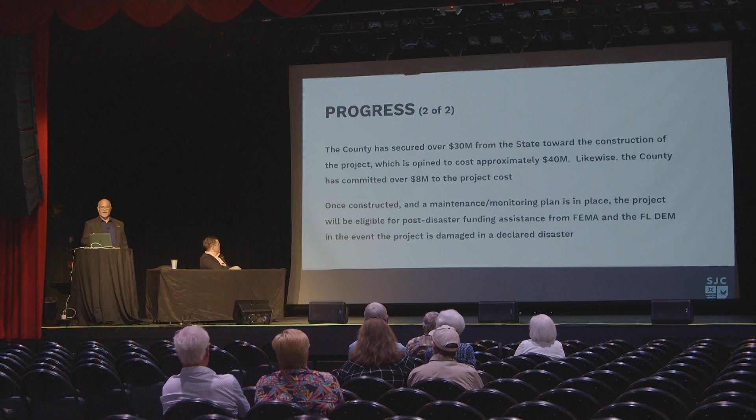So, a little bit about the beach. There are variations in the beach, as we've seen if you've ever ridden down the whole beach. There's a whiter, sandier area towards the north, and a lot of that is sand that drifts down in the prevailing north to south flow from the Army Corps projects in Jacksonville Beach.

And then it transitions into more of the shelly coquina down towards the Guana Beach Park. So that sand coming from the Duval project has really been at least matching most of the erosion that didn't come from storms in that northern 1/3 of the project area, roughly 3 miles there. So we've tried to match this to the actual different areas of the beaches.

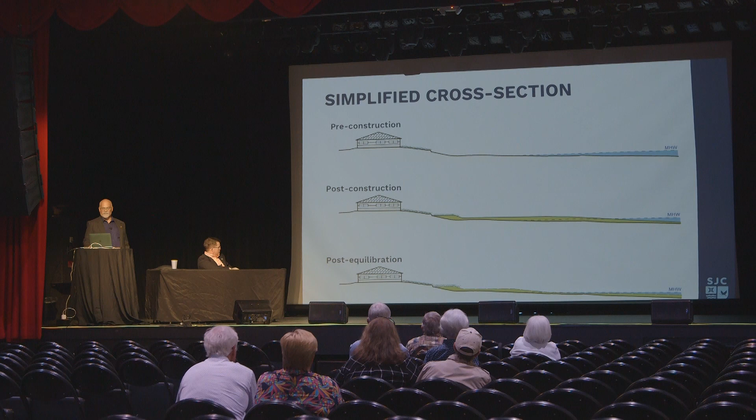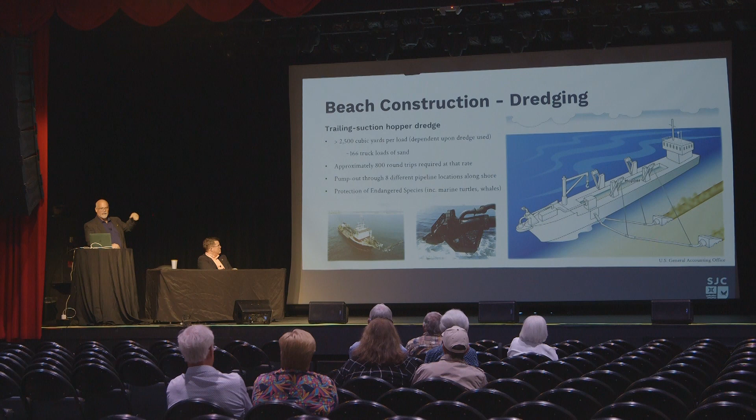This moves very quickly. As they're doing this, they're building the beach, they're adding pipe to the segment, they move fairly quickly down the beach. They do 200 to 600 feet a day under good conditions. So you really shouldn't have this operation itself, the slurry pit and the active shaping of the sand, for more than, say, 2 to 4 days in front of any given property. Now, if there's inclement weather, a nor'easter, or some kind of mechanical problem, it can stall their progress.

And this pipe that you see on the beach that's pumping, they'll have multiple connections that come in from the ocean that they can connect to. They'll connect to a pipe, there's an elbow, it goes a certain distance down the beach, and then they'll flip it over and go the other way. And there'll be multiple pipes. So that pipe is put down and then picked back up. They don't leave the pipe on the beach for very long. It's only there for, say, a week to a month in front of any given property. While it's there, they will have to put sand ramps across it.

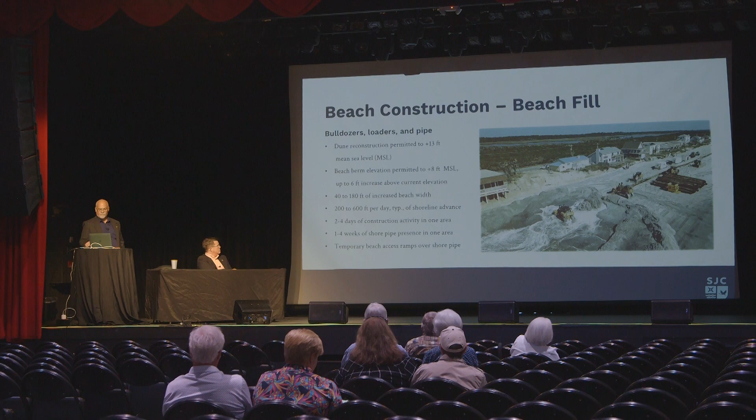And this is what a typical project like this looks like when it's done. You can see on the ocean edge there's starting to show a little bit of erosion. And that's an intentional process. That's called equilibration. So I'm going to zoom back to that engineered beach profile that we looked at earlier. If you look at the bottom right-hand side, it says prediction of equilibrated profile. What that means is that section, that dashed line that you see inside the blue, is where we want the sand to be to help those waves break further out.

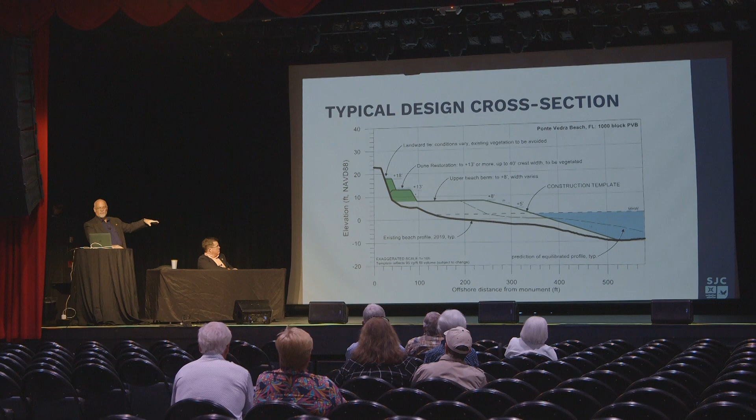So we know we can't push the ocean back, put the sand down and let the water come back. So the way we accomplish that is that we put extra sand up on the dry beach, knowing that the waves are going to hit it, and they'll pull it down into the near shore system, those sandbars where you typically see the waves breaking. So the beach will be built out much further than we anticipate it being within the next few months. That process happens very quickly. In 2 to 3 months, you'll see that a lot of that sand right on the fore area has moved into the near shore system. And that's the process that we saw here, sand beginning to pull out into the sandbars immediately offshore.

So we have some items that we'll talk about in next steps. There are some surveys as far as property owner surveys and easements from property owners. So we've got maybe 2 to 4 months to work on that. Then we have to put this project out to bid.

We put together a very substantial set of plans and specifications as to how a firm has to accomplish the work described in the plans. That's advertised for a period of time, and these companies have an opportunity to bid on it. We'll make a lot of noise so that they hear us. There's only 5 or 6 firms that have this kind of equipment, and they're very busy. They do this all over the coastline.

So 3 to 4 months it will take to advertise the bid, receive the bids, pick out the lowest bidder, and go through the contracting process of getting everything executed, their insurance, their construction bonds, all the things that we need to let them go on the beach.

And then once we give them notice that they may proceed, it'll take them roughly 2 months to bring all of the equipment. They'll float that pipe that you saw, they'll float that in from offshore. At least one large dredge vessel will come. They may bring 2 and be able to work either both ships working one pipeline or work simultaneous pipelines.

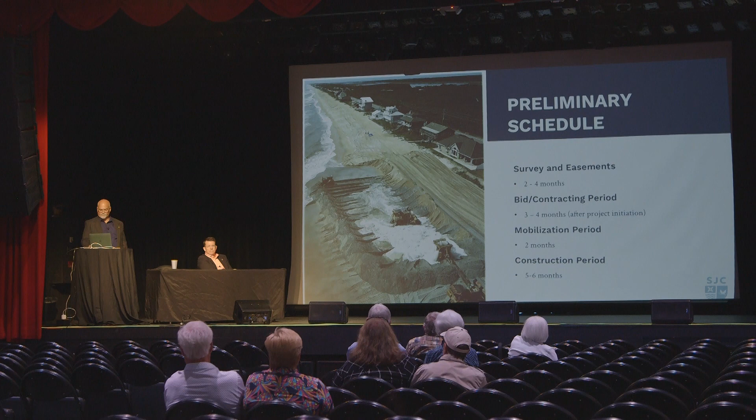So some of the to-do items, one of the permit requirements from the Florida Department of Environmental Protection involves the execution of a state law that says if you're going to do any kind of project like this where you push out where the mean high water level intersects with the beach, that mean high water line, if you will, is that you have to memorialize where that line was before you push out the beach.

That line, since the founding of Florida, has been the boundary between the upland properties and the underwater property that's owned by the state of Florida. So statute says that the state has to memorialize where that line is to say, well, this is where state property was, and if there's additional sand added, that's still state property. So we've already surveyed that line.

August 29th, they went out, they find what is that elevation? At a certain elevation above sea level, that's where they've studied it for 19 years as an epoch. And the DEP has levels, and it actually changes from beach to beach where the level of that is because of the way that the ocean shapes itself.

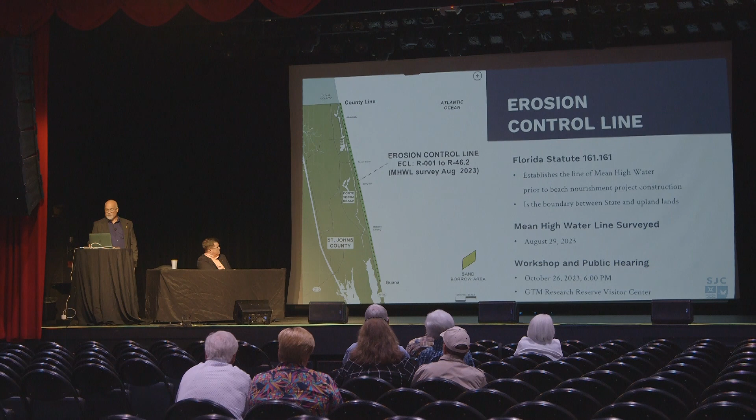So another step is with the property owners, we need easements to be able to do the work on the beach. So as we know, the beach is subject to customary use. People can walk on the beach, ride their bikes, put a towel down, swim, whatever. But what's not really customary is construction on the beach. So those rules, those laws that are in place don't enable us to do this work without a specific easement

from the property owners. So we just did the FEMA berms, got hundreds of easements. We had another storm come. We knew that this project was coming.

We said, let's try and get an easement that covers multiple types of projects. We could do this project, we can do FEMA projects as they come on board. Instead of coming back to these people every few months and trying to get a new easement, we came up with a generic easement that will allow us to do all this work.

I believe that as of tonight, we have 220 out of the 272 in this specific project area. So if you have not granted an easement and you would like to, we will get you in touch with the real estate division at the county, and they can help you execute an easement. If you have already sent in an easement and have any questions about it, we'll be glad to discuss that with you.

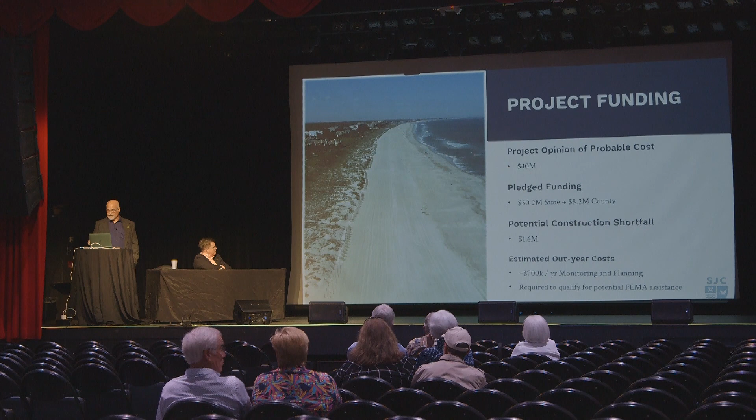Now, what we're talking about tonight is not a set period of coming back and repairing this. This funding is to do it one time. So as we come up to the point where we need to do it again, whether it's for some kind of event or because we've been fortunate there hasn't been an event and it's starting to wear, we will come back and talk to the community about doing it again. And there will be a separate funding effort at that time. We'll, of course, always try and get as much support as we can from the state and federal level, and we may be talking to the property owners about funding a portion of it.

So as we embarked upon this effort in 2018, the community members that really spearheaded this effort realized that there was going to be some kind of funding needed for this. So they worked with the county to set up what's called municipal service taxing units. We had some meetings just like this one in this room in 2018. Surveys were mailed out to all of the property owners to see if they wanted to participate in one of these taxing units. At that time, it was a phase one to provide funding for all of the planning, permitting and design work that we've embarked upon. There was an MSTU created. There was no money levied on it. So there was never any tax that was required in that unit.

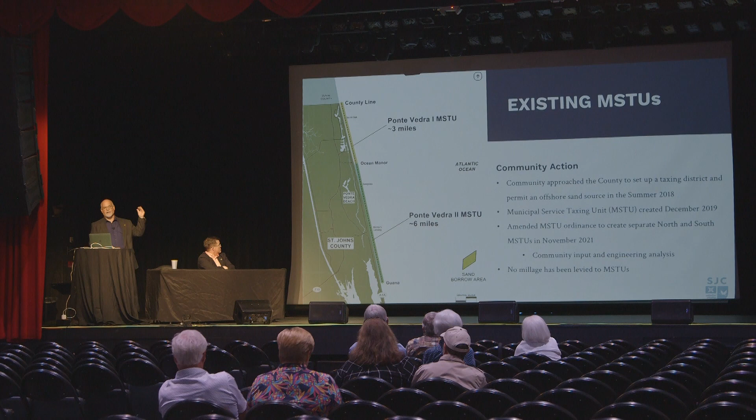The county commission had decided that they were going to fund all of the work that we've been doing collectively here. And there's been a substantial amount of discussion in the board with the community. And in '21, they split the MSTU into two MSTUs. So now in that yellow area, the northern 3 miles is a separate taxing district than the green area in the southern 6 miles. And again, no millage has ever been levied.

So we do have that shortfall in construction, and we do have the monitoring and planning expenses. So the board has directed us to come to you and talk to you. The taxing district's already in place, but they haven't levied anything. Before they actually levy anything, they want to know, are the property owners in that area, which includes all of the oceanfront properties east of Ponte Vedra Boulevard in the project area... They've asked us to survey those property owners to see if they're willing to participate in an up-to amount.

So every year, as part of the normal budget process, for any taxing units, like there is a fire municipal service taxing unit that's county-wide, the county has to say, this year we're going to levy this amount for fire. And there are other MSTUs in different areas for different purposes. So what they're asking is, in the northern area, if you live in those northern 3 miles, would you be willing to have a levy of up to 0.39 mils? So a mil is 1/10 of 1%. So this is roughly 0.04 of 1%.

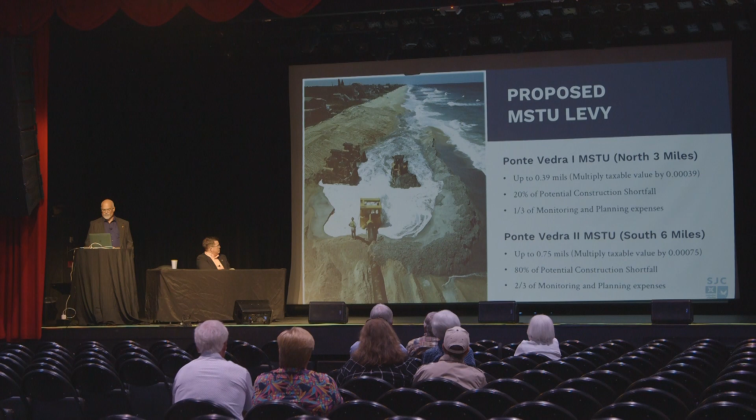The southern 6 miles, that MSTU, they're asking, are you willing to have a levy of up to 0.75 mils? And again, that's roughly 80% of the construction shortfall, and 2/3 of the monitoring and planning expenses. So just the oceanfront property or both sides? Just the oceanfront. That's where the taxing districts were created. So we can follow up on that in a little more detail, but I want to show you what the example is. What does that mean?

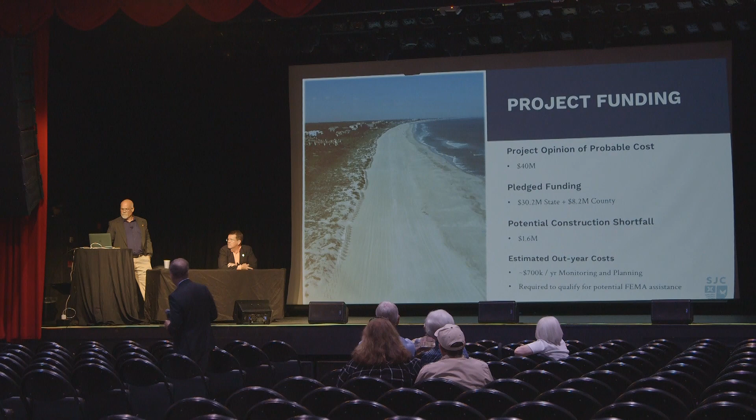There were 2 questions from people watching via Zoom. One was, were easements requested of all property owners regardless of land use? Yes. That's easy. Can the slide indicating easement count be revisited for our friends on Zoom? Certainly. What was the question? It was the slide indicating easement count. Oh, I got you. And I think as of today, we've gotten a couple more since the last meeting.

One of the real estate staff was coming through my office to pick someone up to go execute another easement. I think we're up to 220 out of the 272. And so we have a few months to get the easements. We need to have enough to be able to say to the board, yes, we have enough that we have a viable project. And then some can come in.

We can't have it where you want to wait and see what it looks like at the neighbor's house, so you don't give an easement, and then you run out while the bulldozer's passing you by. That really doesn't work. It's not that fair. It's important before we let the board make the decision that if you want to be in, then that's the time to do it. Because they've seen other projects that have had difficulties from gaps. So they have to decide, are they willing to commit to this project? And if all of the property owners aren't, it's much harder for them.

One follow-up question from a Zoom person. Of the count of easements indicated, how many were obtained from property owners with non-residential land use? I don't have that information with me tonight. There are not that many non-residential properties in the area. And not all of them have participated so far.